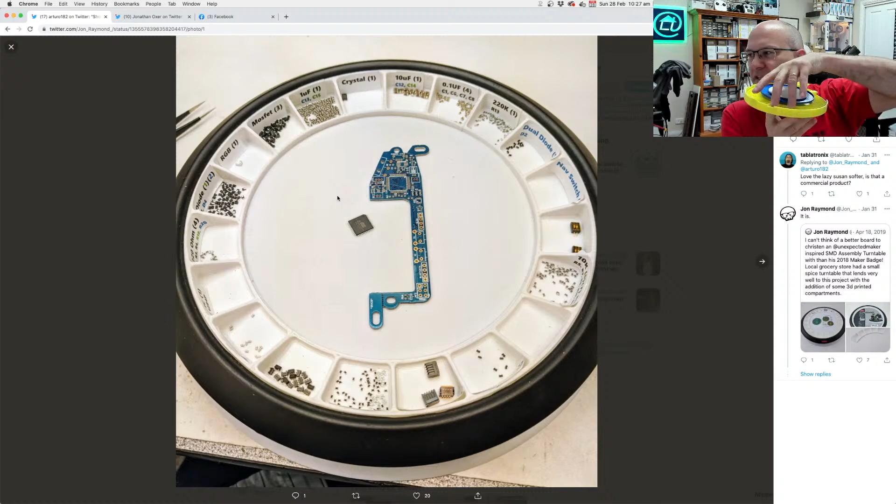Yes, that's really cool. I've got, just up here, the 3D printed parts for Sion's version of the tray, and it's got one of the bearings in it at the moment, so this center part spins, but I don't have the big bearing for the outer part yet. I ordered those, but I'm still waiting for them to arrive. And I'm going to send one down to John Spencer as well, because I think he's already printed the parts ready to be assembled.

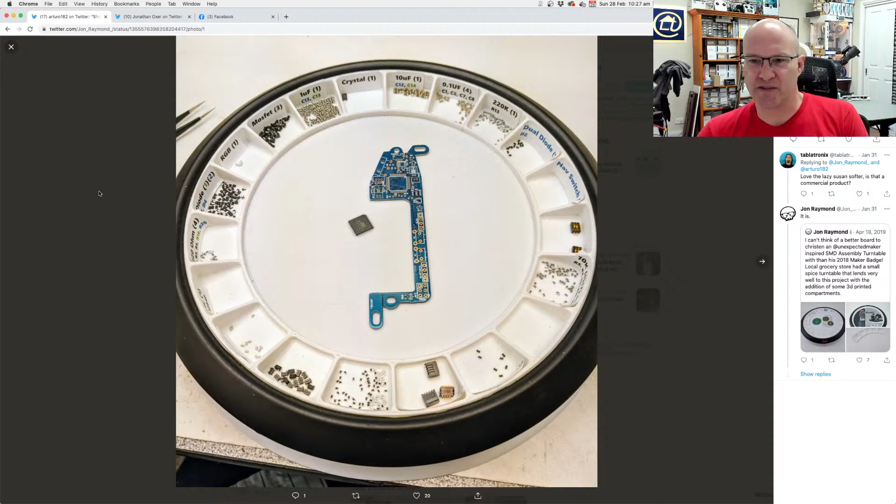Now, oh, and a reflow oven. So, a toaster oven modified with a controller. Now I need to get going on moving through these more quickly.

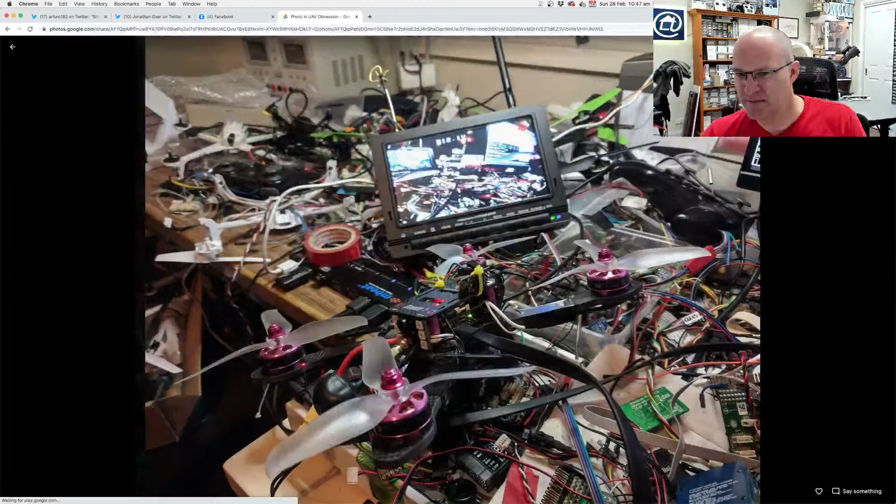Now what was that other photo? What this reminds me is... Workbench. Whose workbench was it? I can't remember. There is a very famous workbench that was, I think, about 300 mil deep in electronic components, built up over years, and I can't remember the name of the engineer who did it.

It's gone out of my mind - someone is shouting it right now. There's a famous engineer whose workbench was just electronic components piled up, and when he wanted a part, it's like having a big pile of Lego - he would literally just grab handfuls, shove the parts aside, and sift through to find what he was wanting. This bench reminds me of that a little bit. It's one of those things where you could spend hours just looking through this, trying to find all the cool things.

I can see - how many flight controllers can I see? 1, 2, 3, 4, 5, 6, and it starts to get out of focus. Many interesting things in there. It's obvious there are drone bits and things everywhere - so many drones just in that picture.

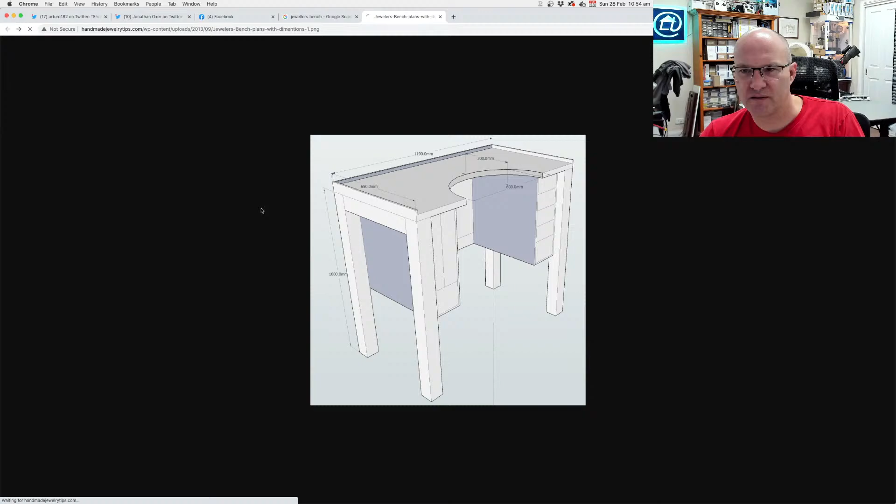Back, come on. Yeah, it looked like there was a photo. Yeah, the jeweler's - let's have a look at this. The jeweler's bench on Amazon.

So yeah, I don't know why in particular, but jewelers seem to have this style of workbench, which I haven't really seen other places. People that do like model building - what is this?

This photo looks crazy. Come on, let's have a look at this. This looks kind of steampunk.

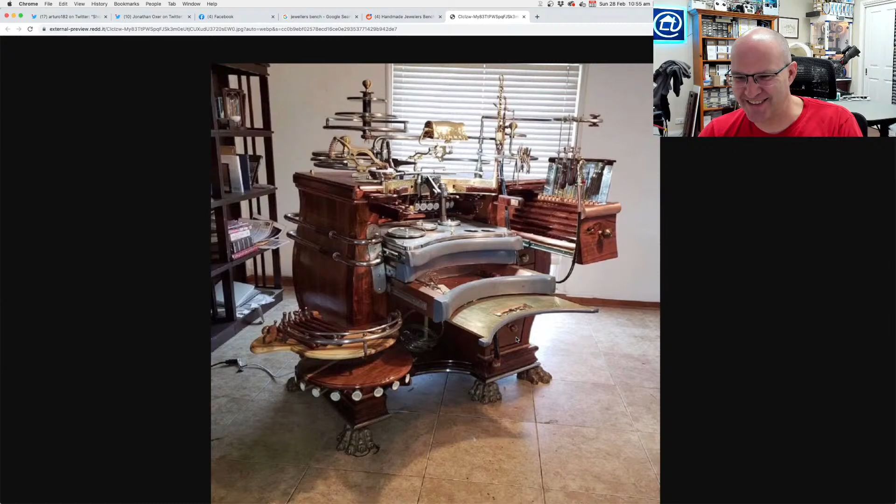Ah wow, I'll bring it across there a little bit. So it's got all these sliding drawers, but they've all got a curved front on them. I don't know if this is practical or if it's just something that's designed to look really cool.

Yeah, so I haven't really seen it in other places other than people who build models, like people into model trains and that sort of thing. I've seen a couple of workbenches that are very similar to jeweler's benches. When you're working on building historical dioramas, model trains, or models of things, a lot of the tools are the same as you'd use as a jeweler. You're doing small drilling and cutting, using files, making little shapes, doing very small scale fabrication. So I've seen a few people with workbenches with that sort of style.

I have no idea what is going on in this picture. That looks crazy.

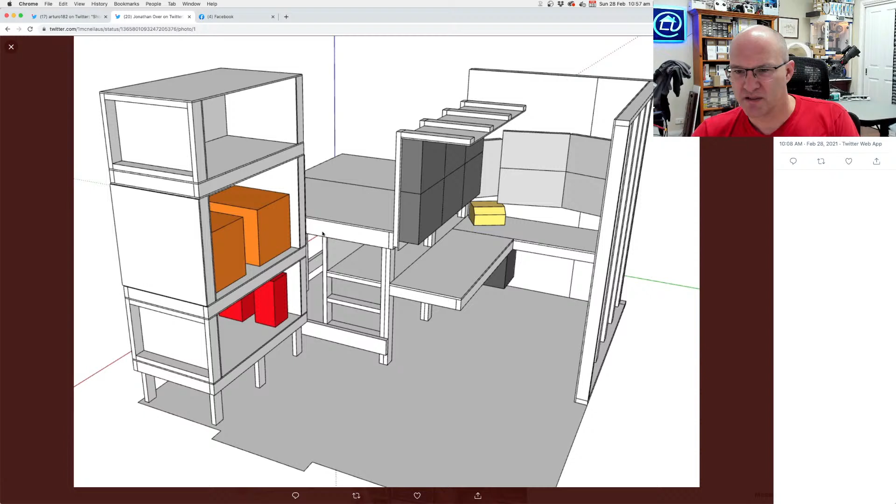Space for 3D printing, queen loft bed, storage, electronics workbench, and large computer monitors. Ah, I see, so that's what this space is back here - this is where the bed goes. Am I interpreting this correctly? That's what it looks like to me. I think this is like a... well, when I first glanced at that I thought that's steps, so maybe you climb up there into this area. So 3D printing maybe in this area, electronics workbench, large computer monitors, yep, and storage shelves over here. So there's a little enclosed space here which is where the workbench is, and then storage goes underneath the loft bed. Oh, Austin just said, yes that's right. Cool, okay, yeah, that's a really clever use of space.

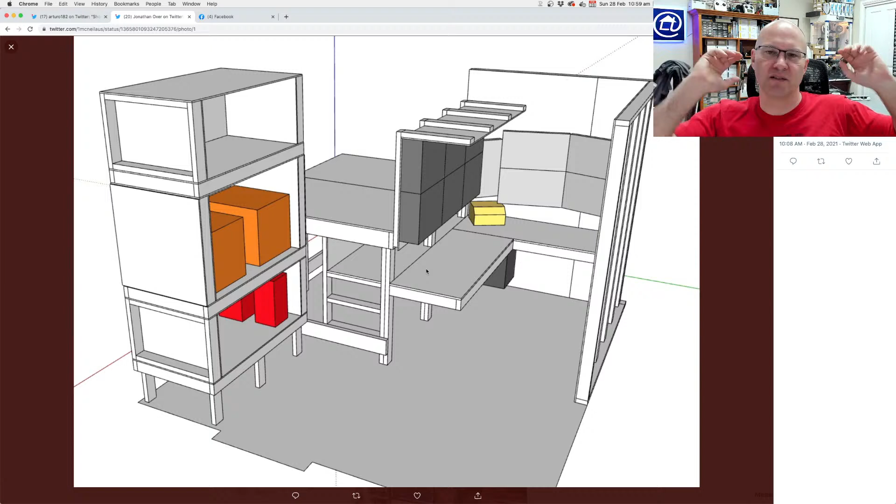Sometime I should post a photo of what we did with my son's bed - we had a cabinet maker build a custom bed for him, which is like a bunk bed, except there's no bottom bunk. The whole bottom part of it is just storage, drawers and cupboards and things. So it's like he's on top of a bunk but with all storage underneath him, and the top is all enclosed as well. It was custom designed to fit the space, and the top part of it goes all the way to the ceiling and joins the ceiling. So it's like the whole bed is built in as part of the room. It looks really cool, and up there he's got a monitor mounted in it, and there's LED lighting around it. It's a pretty awesome setup.

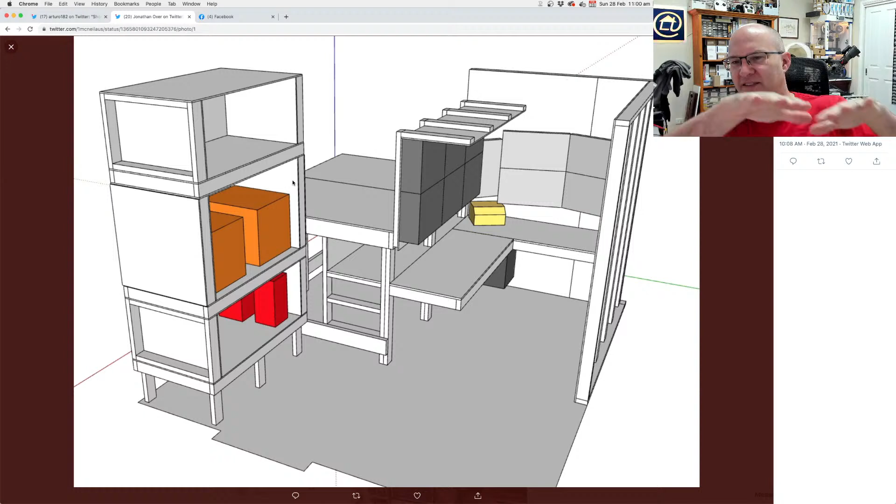So yeah, this sort of thing where you use the space under the bed for storage and elevate the bed, that's really clever. But Austin, one thing that worries me is the practicality of how you're going to do things like change your sheets on the bed - it's awkward to get up there and do things on it. If you need to take the mattress out to put a fitted sheet on it, that would be really awkward when it's up in that area. But I really like the way you're conceptualizing this and making everything fit together. That's really cool. Looks like maybe a computer down under the bench here.

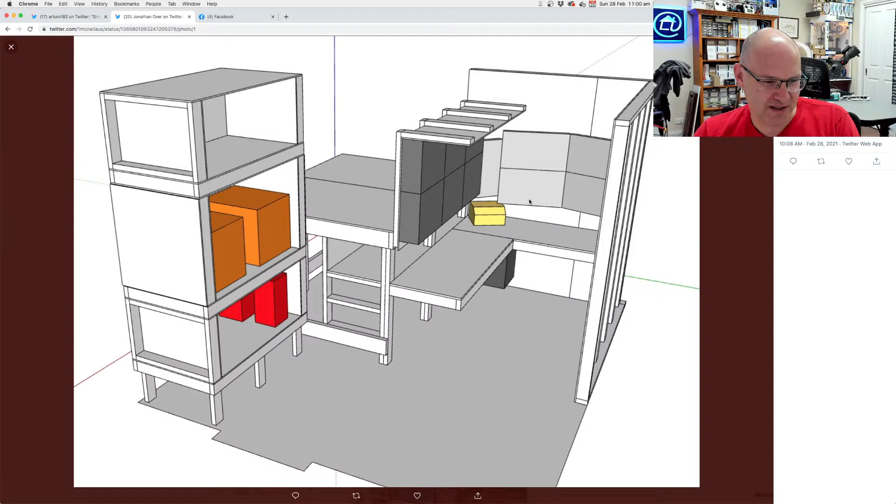And oh, okay. So Austin said, full explanation of everything on Discord, of parts and items, two little characters on Twitter, and in this setup I'm limited with - well, it says 88-foot ceilings. Does that mean 8 foot 8 inches? Because I don't think 88-foot ceilings would be a limitation.

Okay, so Old Hack said... where is it?